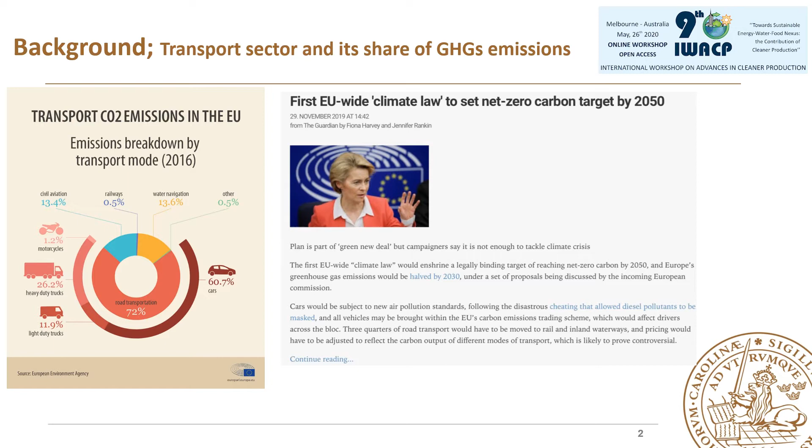The transport sector is responsible for nearly 30% of EU total CO2 emissions, of which predominantly 72% come from road transportation. As part of an effort to reduce CO2 emissions, the EU has set a goal of reducing emissions from transport by 60% by 2050 compared to 1990 levels. The right pictures in this slide show the EU Green Deal, which is a proposal for a law, as you may see in this slide, and a few more coming up. It is kind of a pressure cooker environment for the automotive industry.

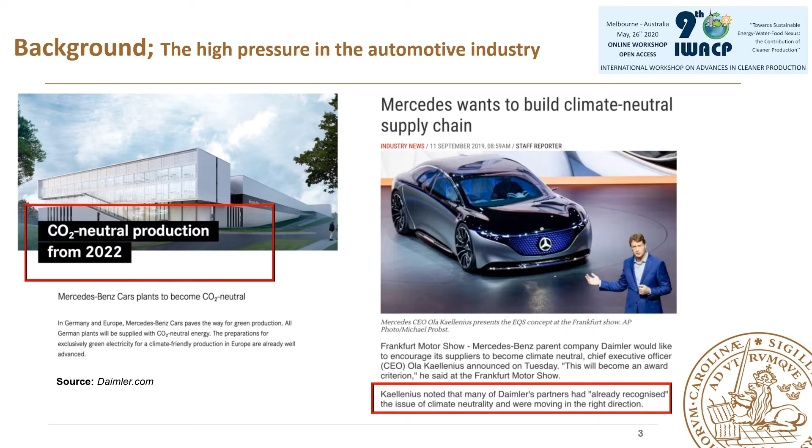The transportation industry landscape is going through a massive transformation due to trends such as autonomous and electrified vehicles. In the case of electrified vehicles, the internal combustion engine would most likely be the prominent power source in motor vehicles until 2030. However, advancement, adoption, and deployment of hybrid and electric vehicles seems to be much faster. There's also significant social pressure on industry to be held accountable to the new strict air pollution standards, particularly the automotive industry due to scandals in recent years over vehicle emissions.

As a result, there are many movements from market-leading car manufacturers, for example Mercedes-Benz, to move towards CO2 neutral production from 2022. New modern power and drivetrains need to be designed and manufactured based on rising automaker requirements like higher performance. Meanwhile, costs must be minimized in order to obtain or secure market competitiveness. In fact, a company must meet its financial target to realize the sustainability of the company in the first place.

And I'm emphasizing this, as most of the R&D and innovation are on the batteries and storage development side. In the case of internal combustion engines, gearboxes are needed. In the case of electric vehicles, e-motors like planetary gears are needed. So there is a high demand for gear production.

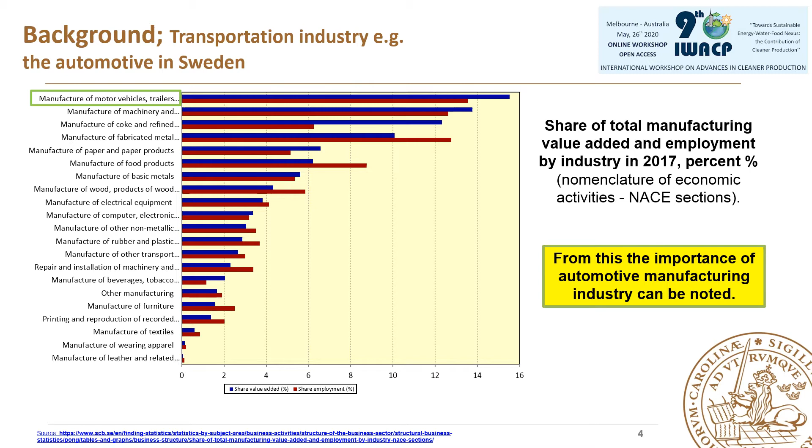Now if you look at the financial situation in Sweden, Swedish GDP rose by 0.1% in the second quarter in seasonally adjusted figures. This is the same trend as the previous quarter. The outcome reinforces the image of the slowdown in the Swedish economy. GDP growth during the first half of 2019 is the weakest since the crisis year 2009. Economic activity has slowed down in Europe as well. In the EU28, GDP rose by 0.2% during the second quarter of 2019, with the largest European economy, Germany, showing a slowdown.

Sustainability has been shown to be a wicked problem. This means that the systems on which we rely are deeply connected and interdependent. This often leads to unintended consequences and rebound effects when working towards sustainability. With the current IPCC report dictating the need to stick to the 1.5-degree target, there is a need for a radical shift, especially in the manufacturing industry. Otherwise, the current practices could only lead to small and slow incremental changes like less bad practices.

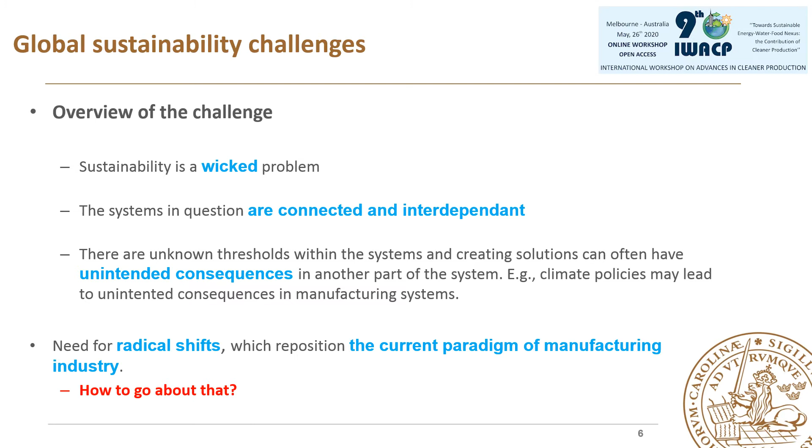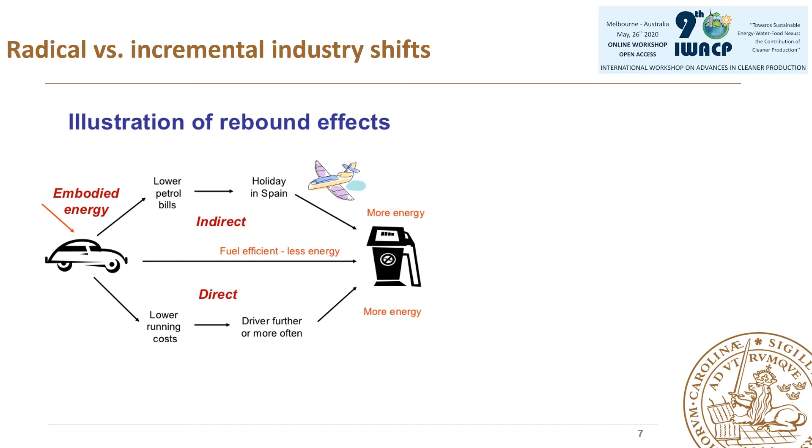An example of unintended consequences from greening manufacturing is as follows. From the designer perspective, they did their best to reduce, for example, the fuel consumption, but that led the car owner to drive more as it cost them less, thus increasing in-use car carbon emissions. Even if the car owner didn't drive more, there's actually an indirect carbon increase, as the fuel saving gives the user more disposable income, which they then may choose to spend on high carbon activities like flying. Thus, the efficiency gains are normally eaten up by continued economic growth and the rebound effect.

The objective of this study is to evaluate how effective carbon policies are depending on how they are influenced at company level. The following are some of the carbon policies we will include in our paper analysis: cap and trade scheme, carbon tax, science-based targets, and internal carbon pricing. For a deeper understanding of the advantages and disadvantages of each of these approaches, I would like to refer you to the literature review section of our article related to carbon policies.

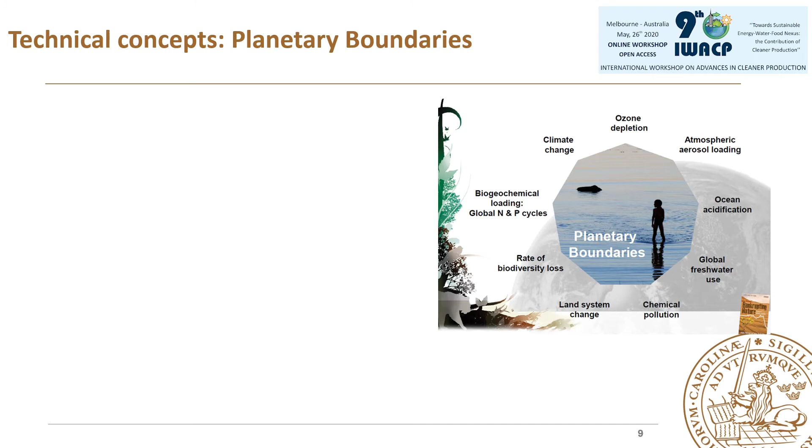As you can see in the picture on the right side, the planetary boundaries show 9 boundaries which are the essential life support system. We have already passed 4 of these 9 tipping points as a global society, being climate change, loss of biosphere integrity, land system change, and altered biogeochemical cycles. The Planetary Boundaries by Earth scientists urges organizations and decision makers on the importance of the respective environmental damages.

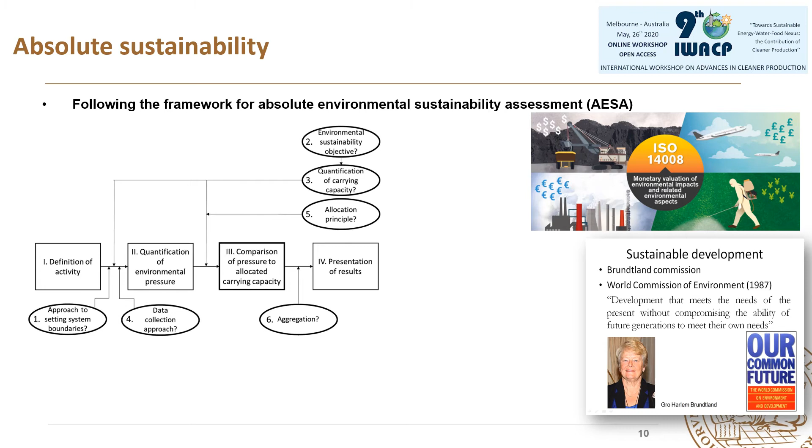In addition to this, we use ISO 14008, which provides a framework that includes principles, requirements, and guidance for monetary valuation of environmental impacts and related environmental aspects, following the principles of welfare economics. And in addition to this, we use Steen's recent 2020 book, which is behind Environmental Priority Strategies. We are currently using these methods, models, and data in addition to the cost model, which I will go through in the next slide. Of course, the details of this are fully written in the manuscript.

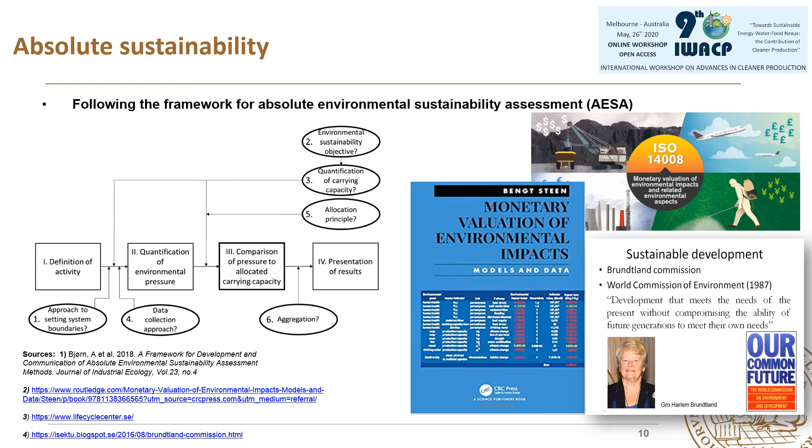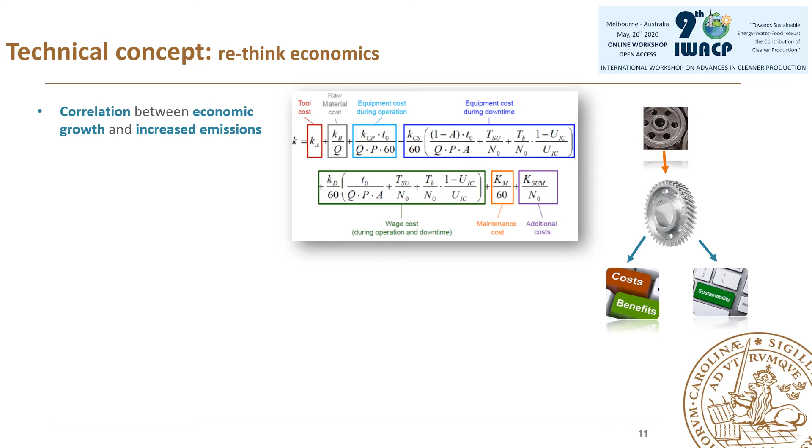As we have seen before, we must decouple economic growth from increased emissions. Thus, we need a comprehensive cost model. This paper utilized a microeconomic cost modeling approach called performance part costing, with a breakdown approach of variables, avoiding the aggregated macro models popular in the automotive industry. This cost model will be updated to include variables related to environmental impact and also CO2, and will be utilized to evaluate both the current and probable future costs of doing business.

In doing so, the usual side effects like impact burden shifting and rebound effects need to be closely monitored and considered from the very beginning. The departure point for this study is a nested dependency model where the economy is a fully owned subsidiary of society and the environment.

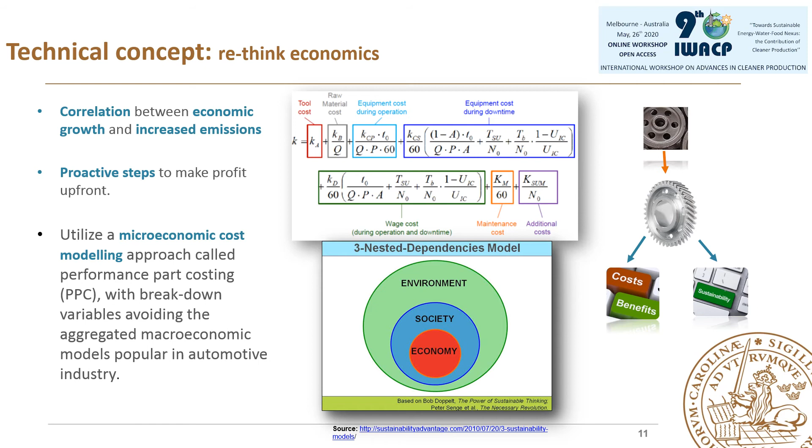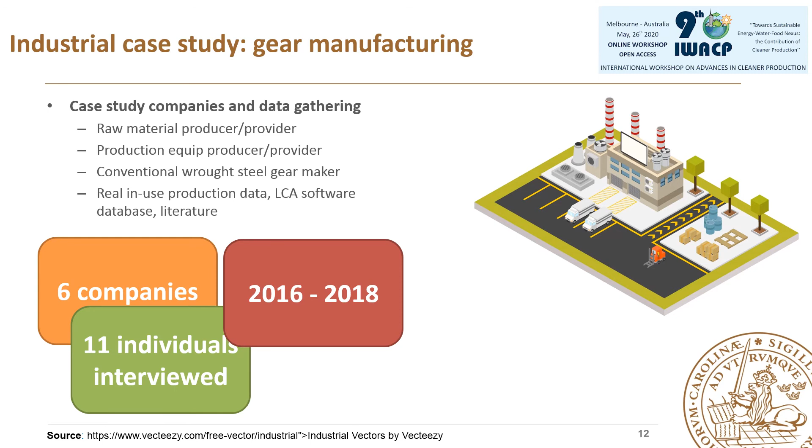This is how we have retrieved the required data for analysis. 6 companies, 11 individuals interviewed between the years 2016 and 2018, and the roles of the interviewees ranged from equipment operator to process and production engineer up to C-suite, being CFOs and CEOs.

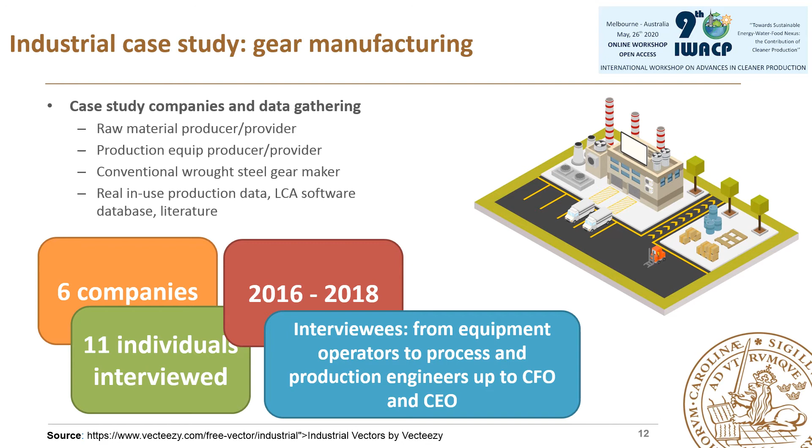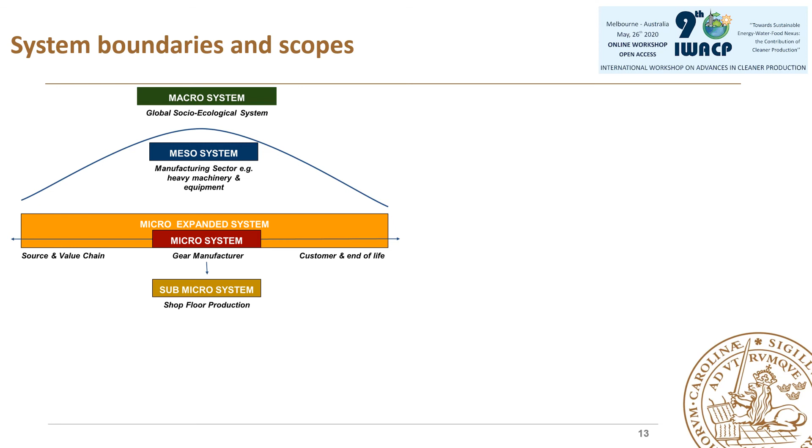Acknowledging the entire value chain impact and also the interlinkages among different systems, we had to narrow this case study scope to cradle to gate, as you can see in the right pictures illustrating the selected processing route. We have developed a detailed manufacturing cost model, as I described in the previous slide, for each and every production step utilized for this gear wheel and calculated the manufacturing cost per fabricated part.

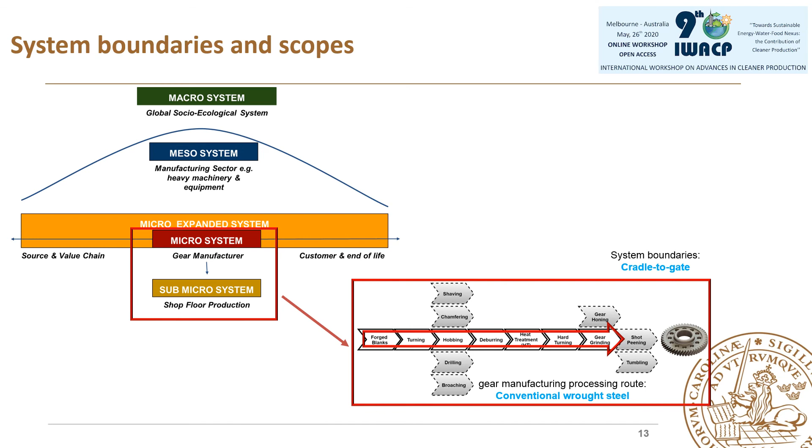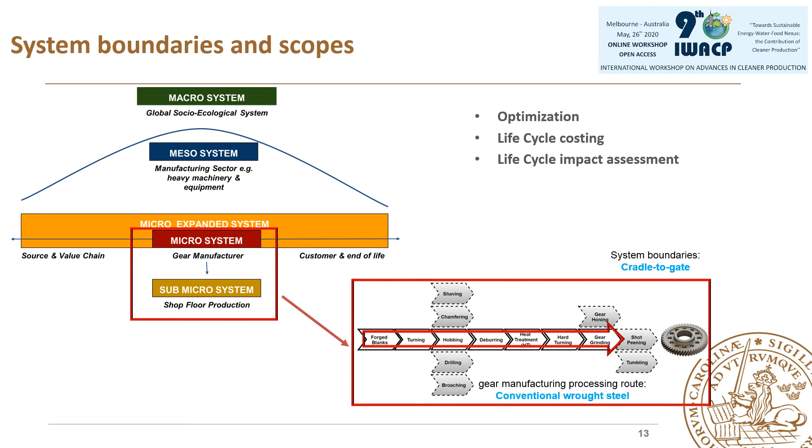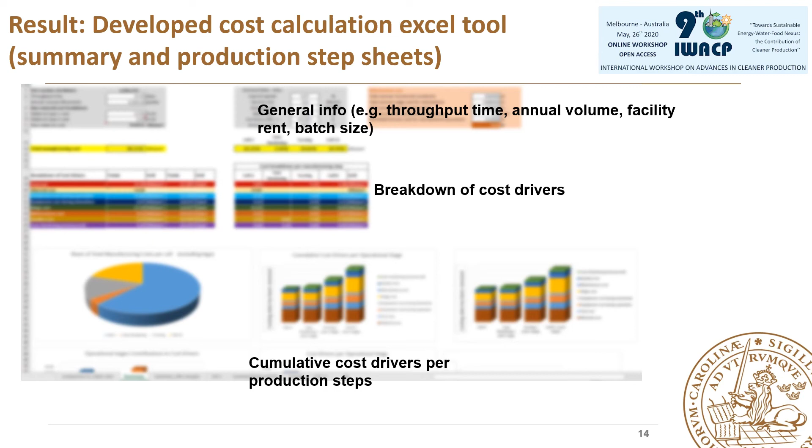With the help of scenario optimization, each cost driver can be simulated to analyze different cost scenarios. Only the following process routes are analyzed in the cradle to gate assessment. The scope is due to data accessibility issues and partner companies' available equipment. This is a dashboard page that we have developed for this case study gear wheel, and for each production step shown in the last slide, there's a separate sheet for scenario planning and detailed variables of each cost driver and how they can be optimized.

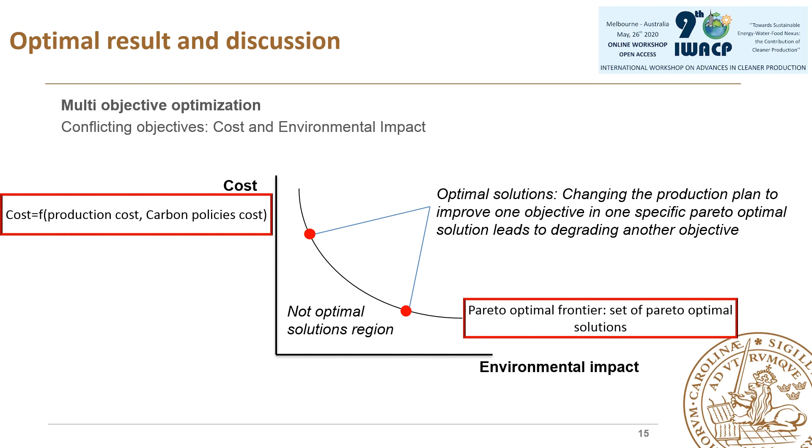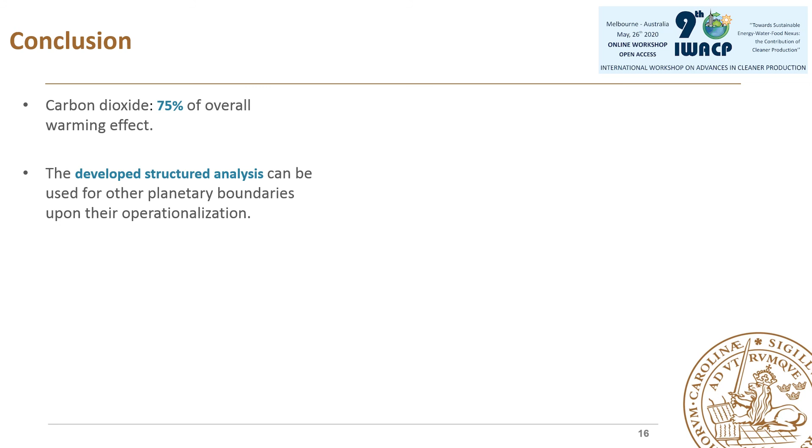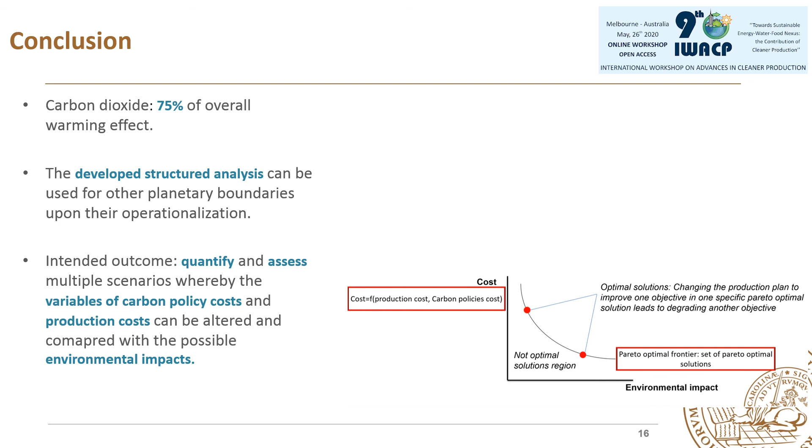To conclude, CO2 contributes approximately 75% of the overall warming effect when evaluated over a 100-year time frame. Given its importance in climate change, it is the focus of this case study. Upon further operationalization of other planetary boundary limits, this structured analysis approach can be replicated for other planetary boundary life support system variables. The intended outcome of this research study is to quantify and assess multiple scenarios for case study companies, whereby the variables of carbon policy costs and production costs can be altered and compared with potential environmental impact, in order to better understand the impact on company profit and possible rebound environmental impact. These scenarios can enable wiser carbon policy design and implementation, from our perspective, to pave the path to the practical progress needed to reach the 1.5 degrees Celsius target.

Our initial data analysis points toward a financial challenge for companies if a progressive carbon policy cost is in place. The planned discussion is around the potential trade-offs of enacting a stringent carbon policy cost, which would require radical change within the sector, versus more incremental carbon policies, which still give space for a sweet spot between company profit level and environmental impact.